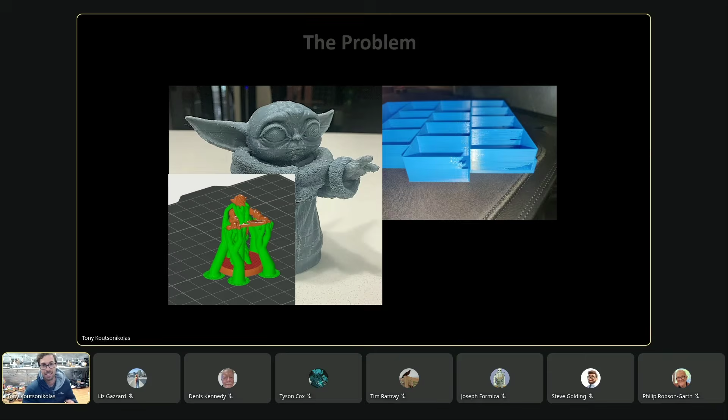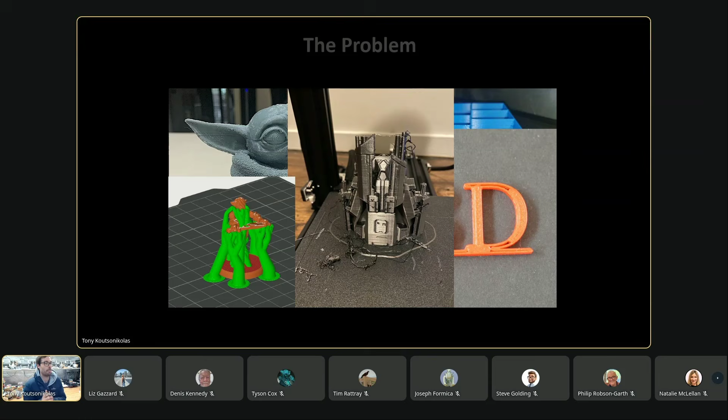Small parts for 3D printing sometimes show scarring. Sometimes you need support material, and the generated support you get from Bambu Slicer is just too big, or it leaves too many marks, or you end up breaking it off. You could also have very thin parts, like text with tiny gaps, or thin little parts that break during printing because there's enough force to snap them. So you have all these issues printing detailed parts, whether that's text, figurines, or thin-walled pieces.

Today I'm going to show you 8 practical solutions, 8 things you can actually do to fix that, plus 1 test print torture test.

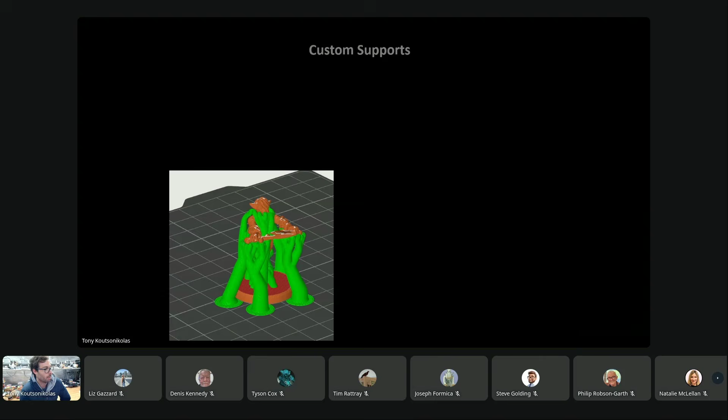Number 1 is generating custom supports using resin support software. We're going to use a slicing software that's specifically for resin printing. Instead of using the auto-generated supports, we'll use supports from this resin software called Chitubox. You basically import your model, add custom supports, and then export your model. This is how easy it is.

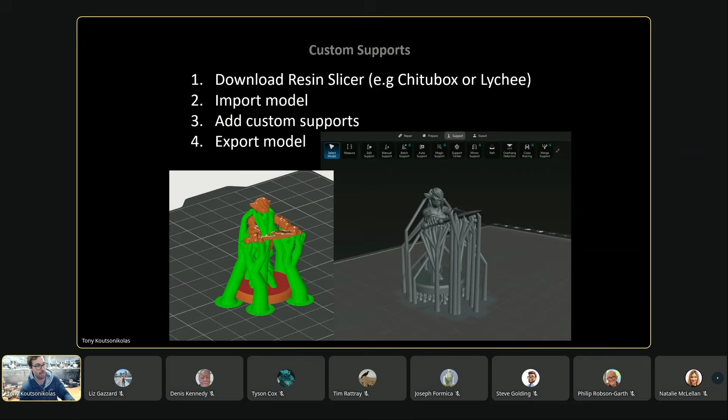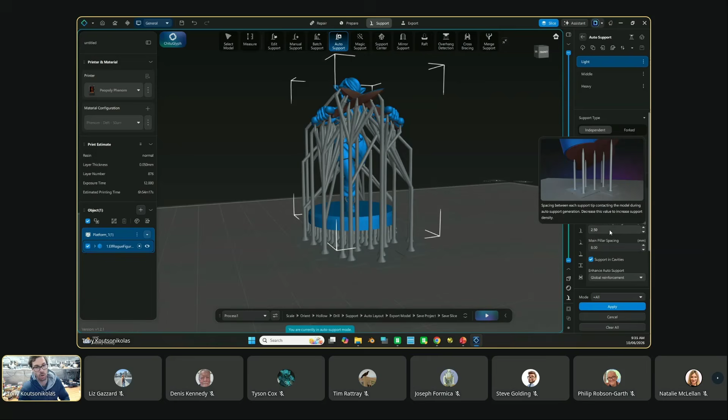You grab your STL, drag it into Chitubox, go to the support tab, and then go to auto support. This raises the model up and shows you all the overhangs. Then you've got all these different settings to play with. If I hit apply, you can see I've got a nice density of support points along the part. I could make this bigger or smaller depending on the part, so this is something you'll have to play with—it really just depends on your model. But you can see how easy it was to generate these supports.

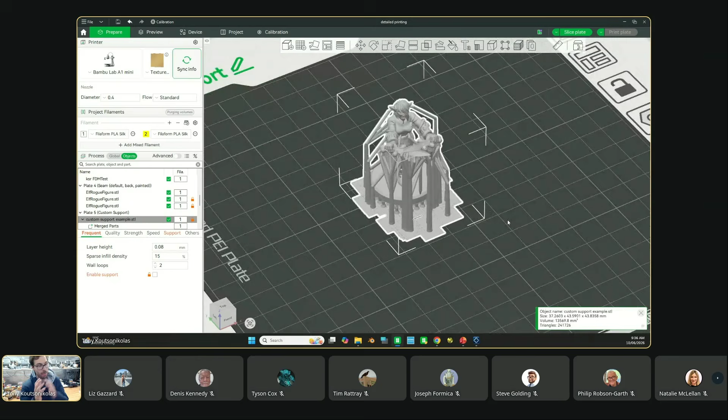All you do is select your model and go to export model, and that downloads it. Then you bring it into your slicing software like this. How cool is that? I'd actually print this with no support enabled in the slicing software, since I've already generated the support here. I'll show you in a bit, because this prints the support and model at really high resolution and quality—we're going to make changes to the settings, since you can print the support with different settings.

Number 2 is the wall generator. By default it's set to classic, which does a fixed width extrusion—the plastic coming out of the nozzle is always the same width. But if you change the wall generator to Arachne, you only have two options, classic or Arachne, and Arachne gives a variable width extrusion. I like to think of it like a tap where you rotate the handle to get a different amount of water out—it adjusts how much plastic flow you get to create different details.

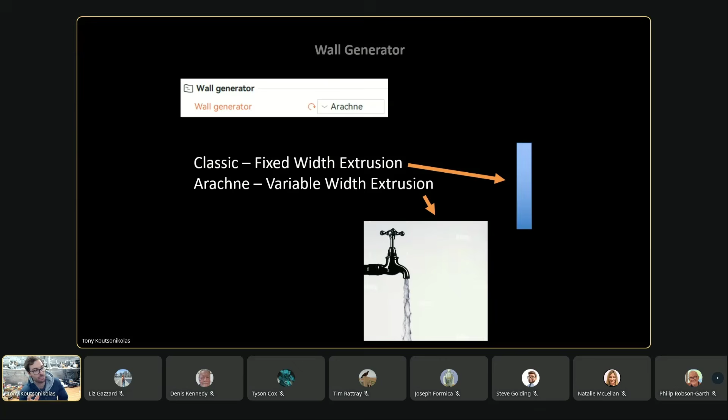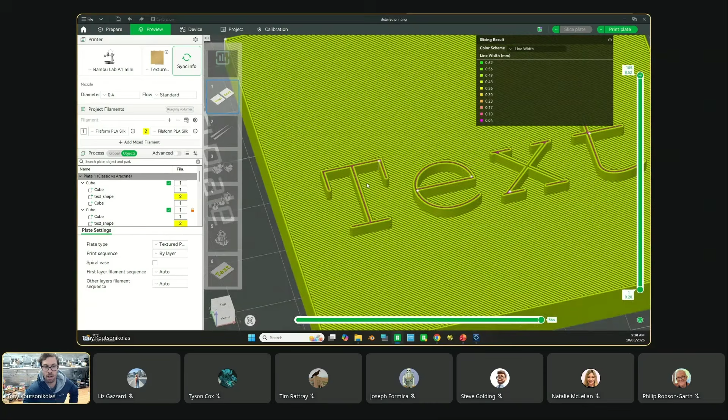You can do a little less for smaller bits, or a little more if it needs to fill in gaps. I've got classic on the left and Arachne on the right. I've just sliced it, and if I change this to line type, you can see this weird white bit in the middle—that's called gap infill. If I change this to line width, you can see the gap infill is a very thin layer, and I've got this very consistent extrusion width on the wall.

Sometimes a clean, consistent extrusion width is a good thing, but mainly with detailed parts, Arachne is almost always going to outperform classic. When I look at Arachne, you can see my width has actually changed—it's increased. If I look at the color scale here, it's gone a bit thicker on this outer wall.

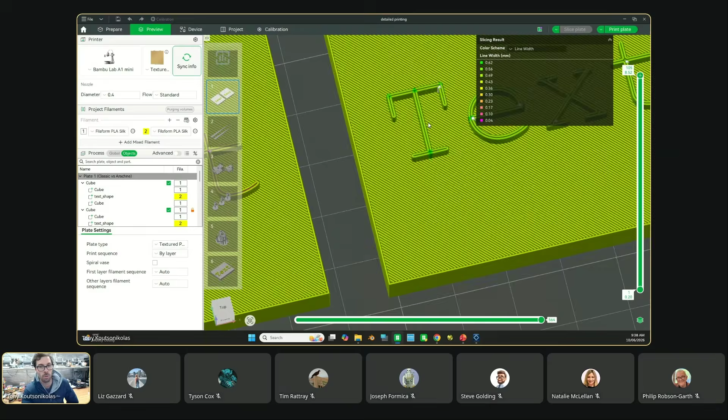So I've got no infill here, none of that weird gap infill that we had with the classic mode, which means that when it prints, it's just going to print one pass around this whole letter, for example. That is going to be a lot cleaner.

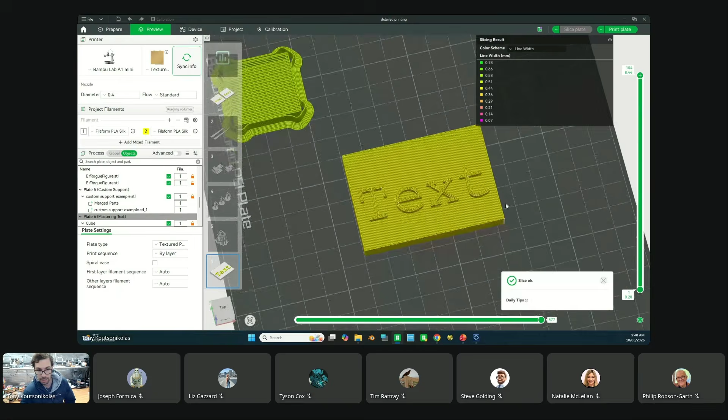Next, continuing on with our text example, there's a few settings here that I guarantee you won't know. So firstly, there's a developer mode in Bambu Studio. We're going to actually have to enable that for this next bit. And we're going to use a setting called interface shells. Here, I've just sliced it like it normally is, like my default settings.

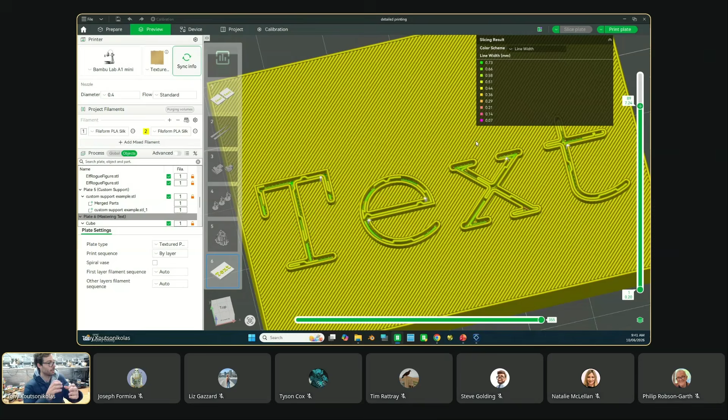And if I go down to that top surface, you can see it's like assuming that the text is there. It hasn't actually printed the text yet. The text is the next layer up like this, right? Then it prints the text. Like you can see here, I've got these thicker bits that it puts in the middle, but then a bit lower, it's got the infill. And all of that change is going to create rough spots. It's going to create surface defects. And that's just a problem.

So let's go through the steps now. So we go File, Preferences, and then I scroll down to Develop Mode. So you've got to turn that on. I've already got mine on. And then I'm going to go to my global settings, click on this part, type in interface shells, and then I'm going to turn that on. So what it says here for interface shells, when there's different volumes, then it's going to treat them separately.

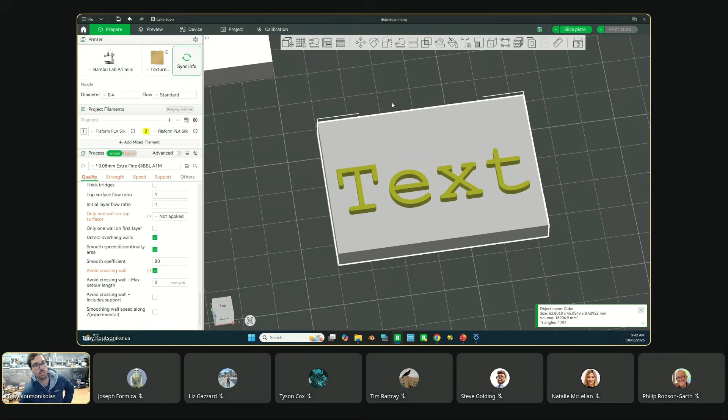But you can't just leave it at that. You also have to change this other setting, only one wall on top surfaces. You can't have this enabled. You have to say not applied. And then once you do that, you can hit slice, and we'll see now, if I go down to this top layer, it's just printing one solid piece. It's completely ignoring the fact that there's text there. And then the text goes on top. That is the cleanest way that you can print text. You'll get the best top surface.

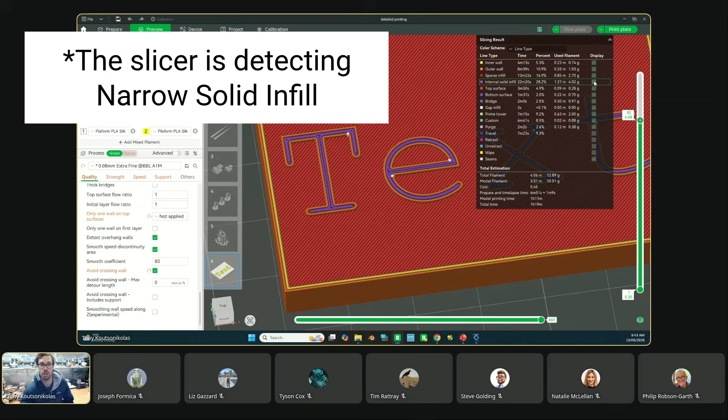But if I go up more, you can see here under line type, I've got these purple regions, and that is internal solid infill. I can turn it on and off here. So you can see that highlighting. And that is going to be an issue because those are really thick pieces. And then you got a thin piece here, and that's just going to create some issues there. So you basically go detect narrow internal solid infill and you turn that off.

And then if I hit slice, instead of before how it was, where it was going thicker and thinner, now it's just a monotonic line. That is a way cleaner way to print this part. Change those settings if you want better text.

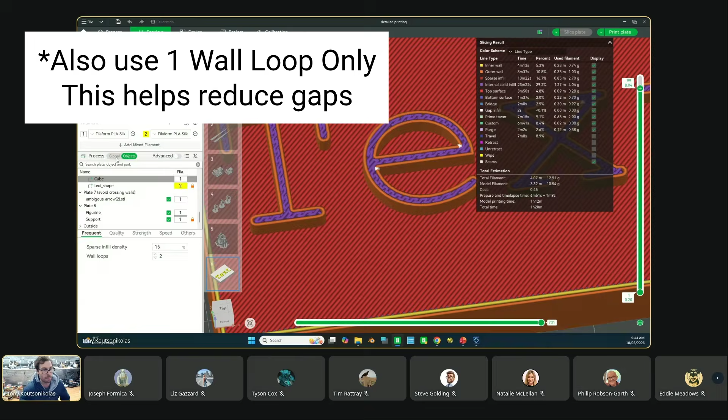Number 4 is speed. So changing the speed is basically something we do to lower vibrations, and we have more accurate placement of the actual plastic that we're laying down. And this also gives us more time to cool the actual plastic. You should have slightly more accurate parts. Go to your speeds and change them. Usually you're going to be printing much smaller layer heights with very fine or detailed parts. So you want to change this anyway, but from your standard profile, you're probably looking at halving the speed.

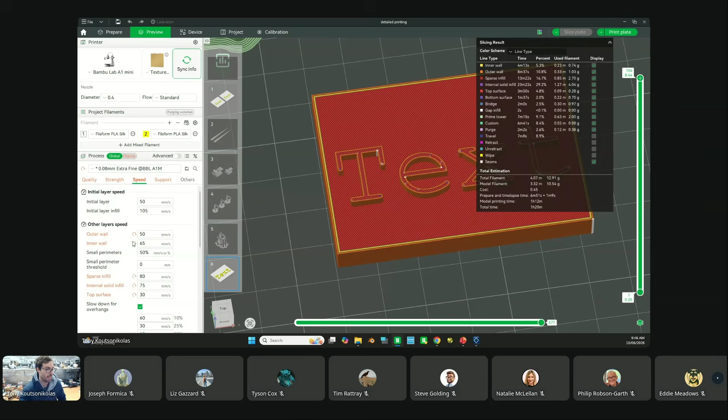And the main speed parameter that we would change, if you could only pick one, would be the outer wall speed. If you compare this to a normal 0.2 millimeter profile, you can see here that I've changed it. If I put this onto the defaults, you can see I have 200 as the outer wall speed. The inner wall is 350, right? And then the infill is 450. So these are much different to these numbers here. We want to be lowering that speed quite a lot.

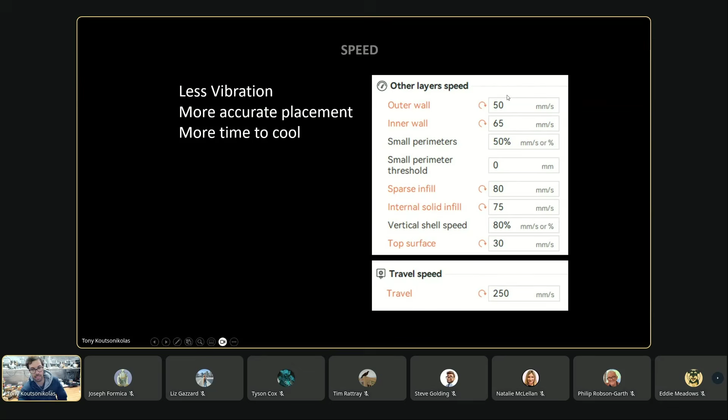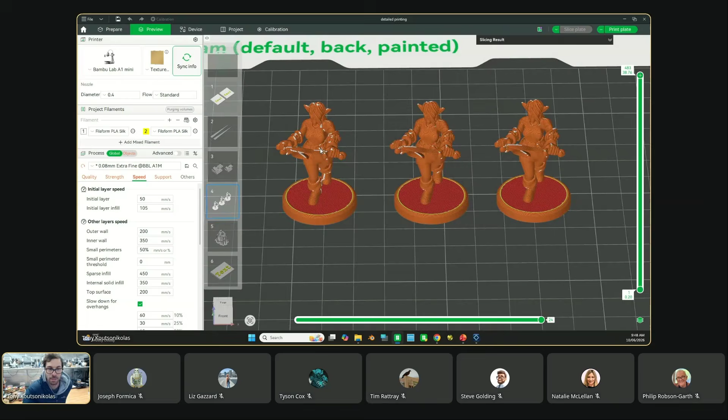Cool thing, if you go to line type, you can hide the supports just by clicking these buttons here. Let's just look at them from the front. And if I have seams selected, it's the white dots. At the first one here, the default, they're kind of just randomly allocated to where it was easily going to be made by the slicer. And then the one where I've selected back is the middle one here. You can see that it's basically right in the middle most of the time.

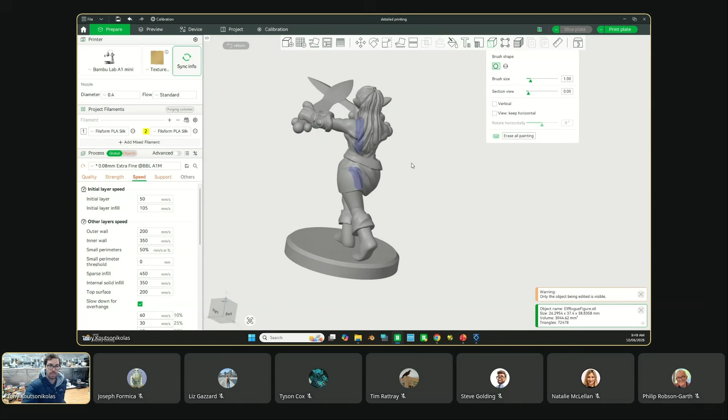And then here, I've actually painted it on. So if I go back to prepare and click this part, you can click this little seam painting tool and paint it along these natural edges. So I wanted the seam to be along the hairline here, and you can change your brush size and do all that. And then say there was another edge somewhere here, I could just go and select it. And that would make it so the seam will try to snap to that position. So you use the natural edge of any of your parts to hide it.

Number 6 is avoid crossing walls. This is a really easy one to do. You just basically enable avoid crossing walls, and you're going to go from something like this. I've shown the travel moves here, those are the blue lines, to something like this. So you literally just turn on this setting, and the travel moves will start to move in the internal sections of your part. If it doesn't have to take a massive detour, it'll do that. And you can see that I'm going to have less crossing at the boundaries of my part, and that'll make the surface quality a little bit better.

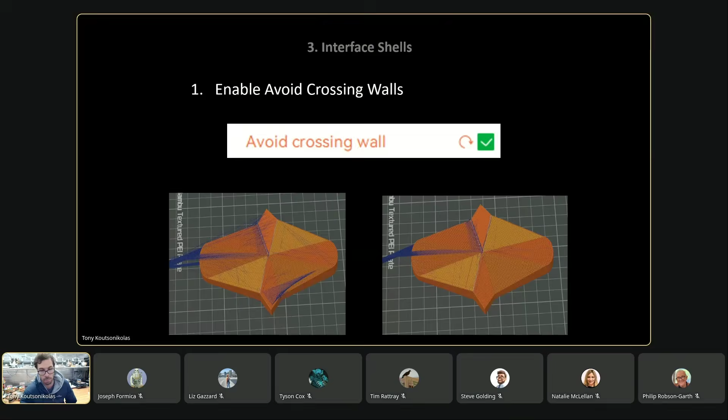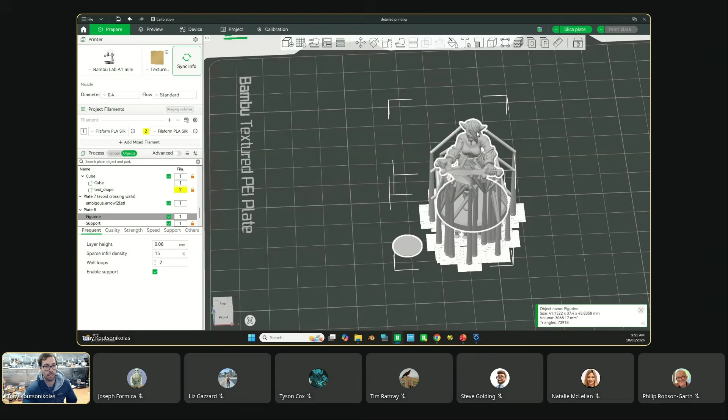And then number 7 is resolution and nozzle diameter. So resolution's a really big one. Obviously smaller will be better. You capture more detail. But if you're using custom supports, the support material doesn't have to be printed with the same layer height. When I print a part, I can click on the part and then go to quality and change the layer height. And if I go to the objects tab, I can also change the layer height there. So you can have 2 different objects, which is what I've got here. I've got the model in one object, and the support I've separated into another object, okay?

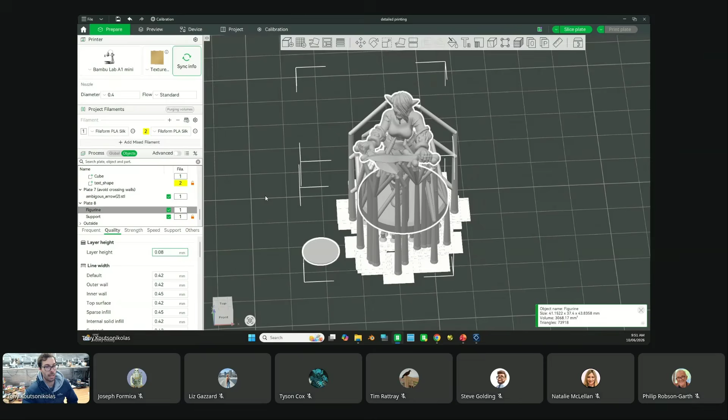So now when I go to quality under my objects tab, I can actually change it. You can see here, I've changed the layer height of the support material to 0.16. So double the layer height of the figurine, which is still set to 0.08, which is the default for my profile here. So if I do that, then it'll print the support material at a different layer height than the actual part. I can do that for most settings.

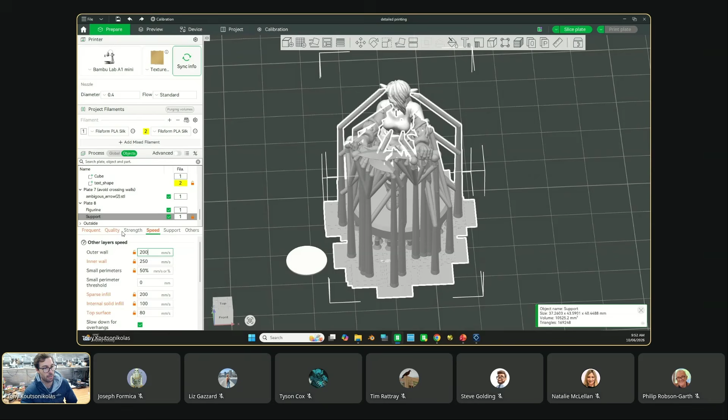I can change the speed. So I can make the support material quicker. It can print way faster. Stuff it, I just go 200, 250 for the outer wall and the inner wall. With the support material, I don't really care how much quality I get there. I could even change the strength and bring the wall loops down. The support material doesn't need to be strong. It could be printed with one wall loop. So the support now is being printed with all these different settings.

So when I say resolution, it's not just about saying, hey, I'm going to use 0.08. It's saying, hey, I'm going to use 0.08 where it matters, which is obviously just the part, right? And then the support material, you can have that different. And that'll save you heaps of time. This could save you 40, 50% print time, which is a huge difference, especially if you're doing this for a business or for a hobby and you just want more out of your machine.

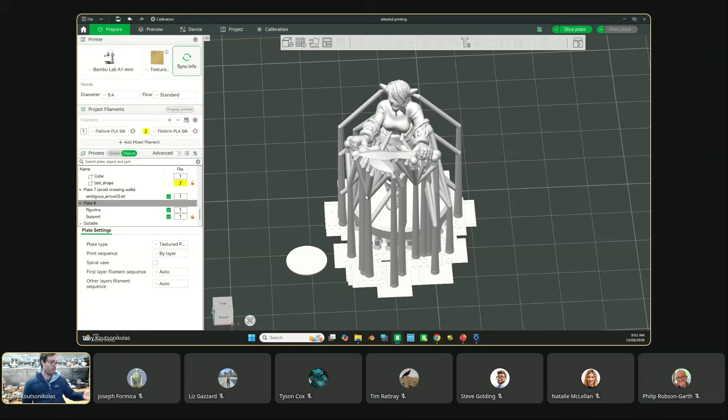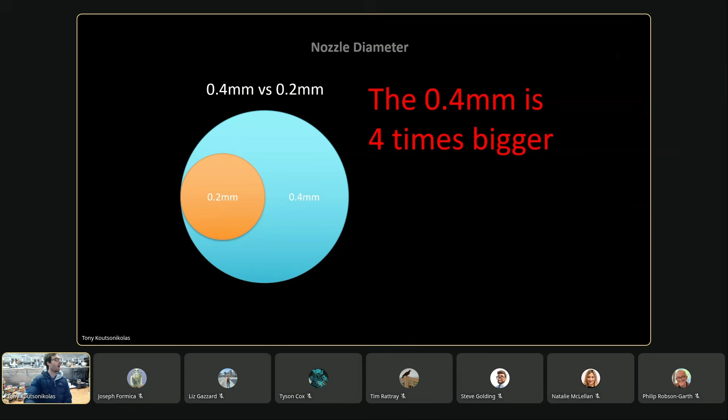Okay. And the next thing on resolution is nozzle diameter. So this is a 0.4 millimeter nozzle, the outlet, let's say, and this is a 0.2. It's half the diameter, but it actually means that the 0.4 is 4 times bigger. This means there is a massive change between the 0.2 and the 0.4. It's bigger than you would think, but what most people don't do is redo their filament optimization. And that brings us to filament optimization.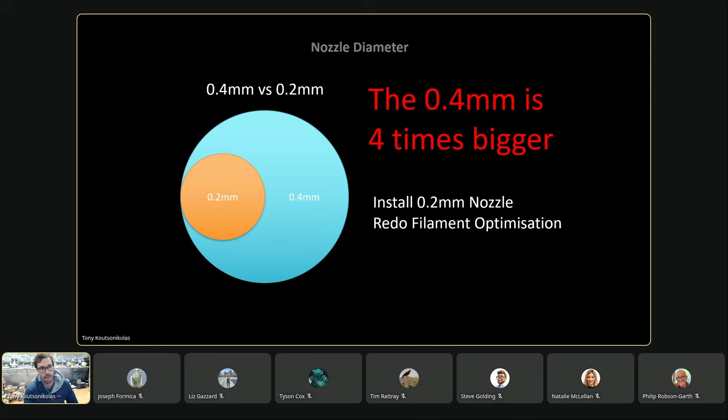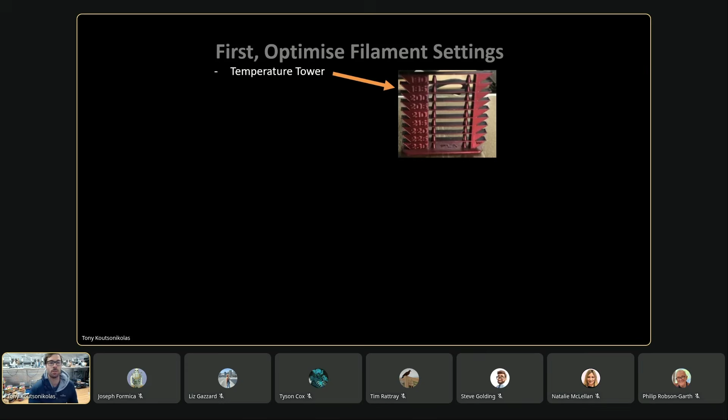A 0.2 millimeter nozzle acts way differently to a 0.4. Just because of how much smaller it is, the cooling rates are totally different. So what you need to do is do a temperature tower. You can look these up on MakerWorld really easily. You can do a flow rate optimization. So in Bambu Slicer, you can do this under the calibration tab. This will help you get the exact right amount of material coming out of your nozzle.

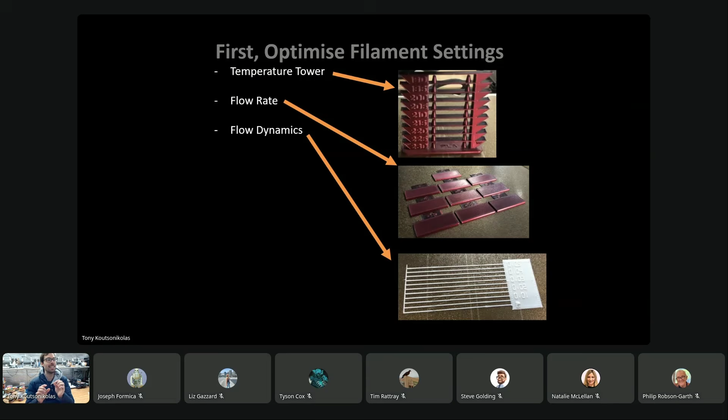Then it's looking at flow dynamics. Again, this one can be done in Bambu Slicer. And basically, this is kind of the equivalent of when you squeeze toothpaste, right? You apply a force to the toothpaste and a little bit of toothpaste comes out. When you stop applying the force, a little bit of toothpaste still flows out because you've created the pressure, right? When you apply a little bit of force to the filament, it will create some flow. And when you stop applying it, there'll be still a tiny bit more flow left. Flow dynamics will take that into account.

And then retraction. So when you have starting and stopping, which is especially important for printing detailed parts like those miniatures and using custom support material, we have lots of stopping and starting. You want to dial in your retraction settings. So you can look up retraction tests again on MakerWorld. I'll also put a link under this post for the one that we use. This is an advanced one that goes through heaps of different settings in one print. It takes a bit more setup time. You do this one print and then you'll just have perfect retraction settings for that setup.

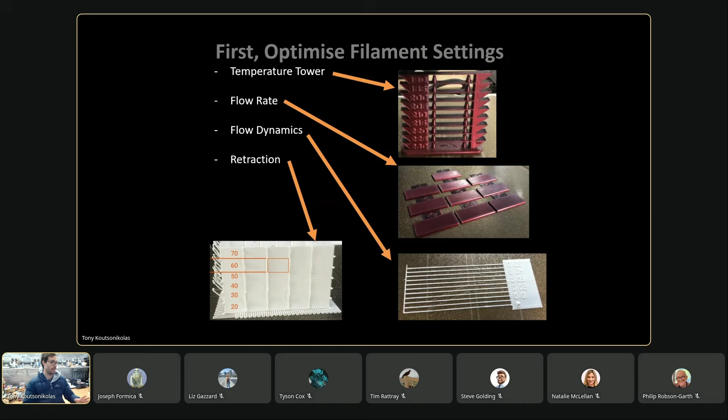So the whole point of this is you get the right amount of material extruded at the right time that cools in the right place. That is why we do those calibrations.

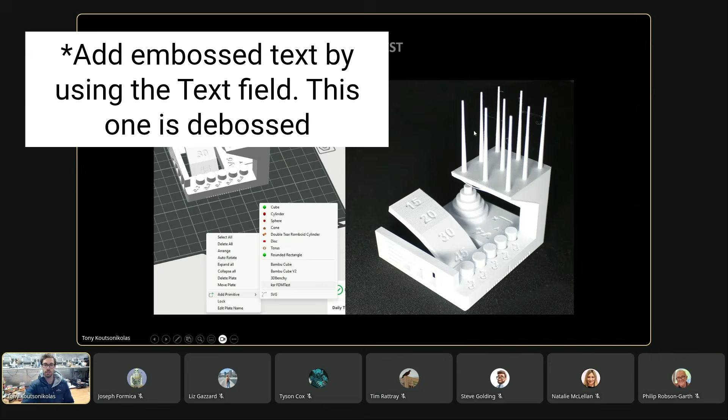All right, so now putting this into practice, here is a torture test that you can print that'll help you assess lots of different features of your part. Now, this obviously looks a bit different to a miniature or the text, but if you look closely, it's got a lot of different features that you'll have to print with those parts. So it's got these bridges here, it's got overhangs, it's got text here and here. You've got lots of little retractions here and here, and then you've got tiny little gaps here and here where all the cylinders are. They're meant to pop in and pop out.

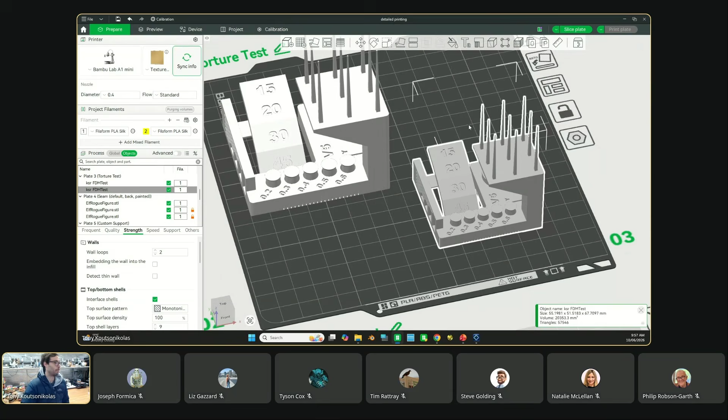And if I go here, all I have to do is right click, add primitive, and you just click KSR FDM test. If you wanted to really push it, you could lower the size, yeah? So obviously the gaps then would be different. So 0.2, if I make this half the size, that gap will now be 0.1, right? Push the limits if you want to get smaller and smaller. If you can print this really well with your printer, with your material, with your new settings that you've changed, you create a profile from these settings, then you're going to be in a really good spot to print anything that is small and detailed.